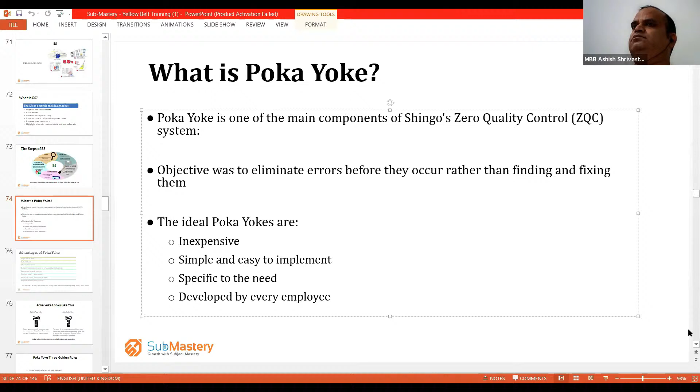What are the advantages of Pokayoke? The main advantage is it improves the quality. If you are not doing any kind of mistakes, if you are not committing any mistakes, it will definitely help you improve your quality.

It will help you reduce your cost. It really eliminates rework, because when you are not committing mistakes or defects, there are no chances of rework. It reduces and eliminates formal in-process quality control, and improves schedule delivery.

If you are not committing errors, your flow is always in the positive, forward direction. So your scheduling is much more accurate and systematic. It also prevents injury and ensures safety.

Safety is very important here. If you're using Pokayoke, it prevents all kinds of injuries. Self satisfaction improves morale - if you are using Pokayoke, you get a lot of satisfaction, and it improves the morale of employees, along with self-check quality control.

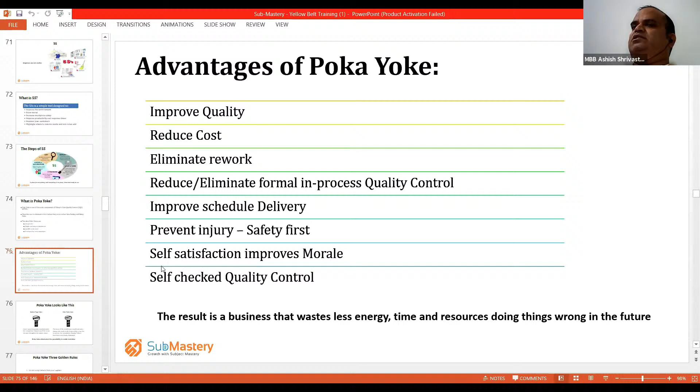Now there are a few examples you can see with these bolts, which are fasteners. In the first picture, when you are using a screwdriver, there is a chance the screwdriver can slip because the screw slot slides against the plastic cover.

But in the second type of shape, you are making some modification in the drawing, in the design. Now you can see in the second type, the chances of error are minimized. Even if you really want to slip your screwdriver, there is no chance at all - because you've made improvements in the design.

Here you can see there is a chance your screwdriver can slip. But here you don't have any such chance, because you are developing a better design here. So the chances of error are negligible - there are no chances of errors.

This is the concept of Pokayoke. You are developing such a system - it can be related to design, process flow, or anything else - so that there is no chance of error at all.

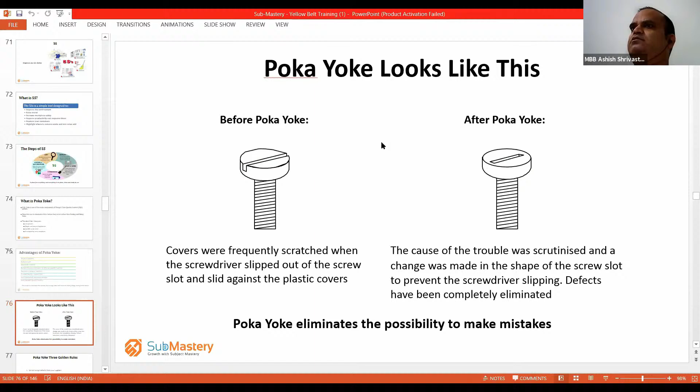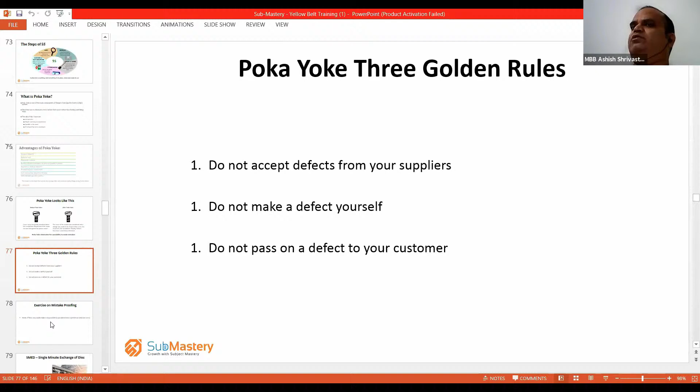So Pokayoke has three golden rules. Do not accept defects from your suppliers. When you accept defects from suppliers, these defects go into your process and finally reach your finished goods, and finally to your customer. So definitely this is not good enough. Do not make a defect yourself, do not commit any kind of defects. That is another rule. And do not pass on a defect to your customer. So these are the three important golden rules in Pokayoke. Remember all these rules.

So there is an exercise, it's a very simple thing guys. Just think, how could you make it impossible to put diesel into a petrol car and vice versa? Just raise your hands.

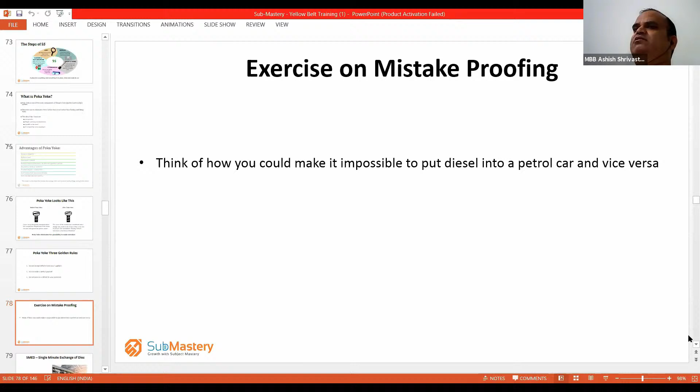There is another term, single minute exchange of die, a very famous methodology, SMED. This SMED is related to installing any tool or job on the machine, and the main objective is how fast you can do it. How fast can you install any job or tool on the machine? That is the concept of single minute exchange of die. So what is SMED?

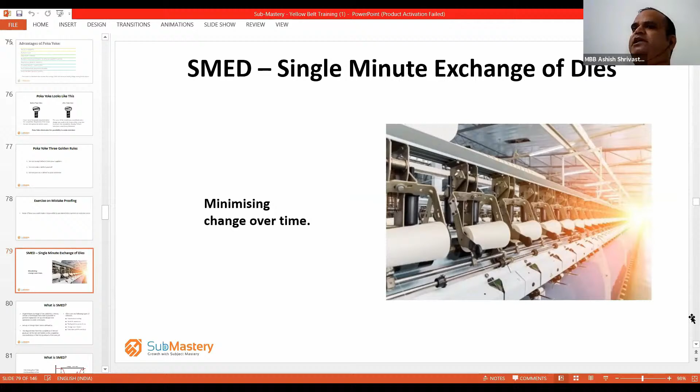SMED, single minute exchange of die, is a theory and set of techniques that make it possible to perform equipment setup and changeover operations in under 10 minutes. Not mandatory, but you have to minimize as much as possible. You need to reduce your setup time or changeover time.

You can use standardized tooling, quick fit connectors, develop changeover teams, and use the Pokayoke concept and 5S. All these combinations will give you very good timing in SMED.

For example, there are two operators. One operator installs a die or job or tool on the machine in 30 minutes, and the same job is installed by another operator within 5 minutes. How is that possible? Because the other operator is more skilled - it might be possible he has more experience also.

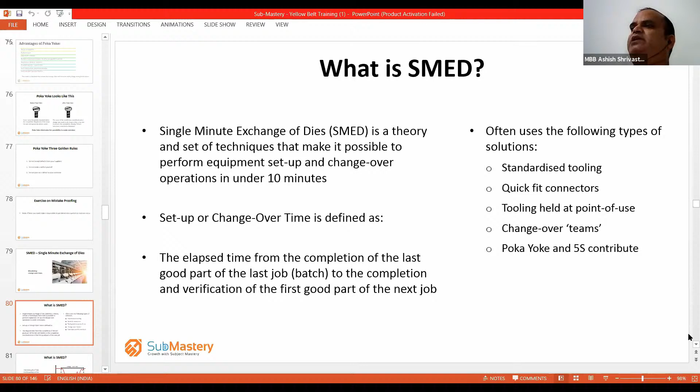So for SMED, practical training is very important. You can't do SMED only with theoretical training. You should rely on practical training. Practical training is extremely important for single minute exchange of die.

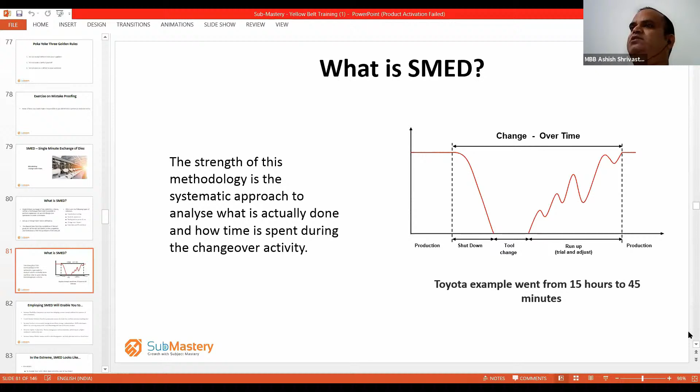Toyota has implemented this SMED. For example, they went from 15 hours to 45 minutes - a tremendous improvement in changeover time. This is something you can do in your processes also, because usually in manufacturing or production, a lot of time is consumed installing any job or die on the machine, especially big dies. If your die is really big or the installation is bulky and more complicated, it will take a lot of time, and then you have to think how you can minimize it.

There is one way - you can develop a high performance team, which we'll go through later on. This kind of high performance team in your system will definitely give you excellent results as compared to ordinary operators or supervisors.

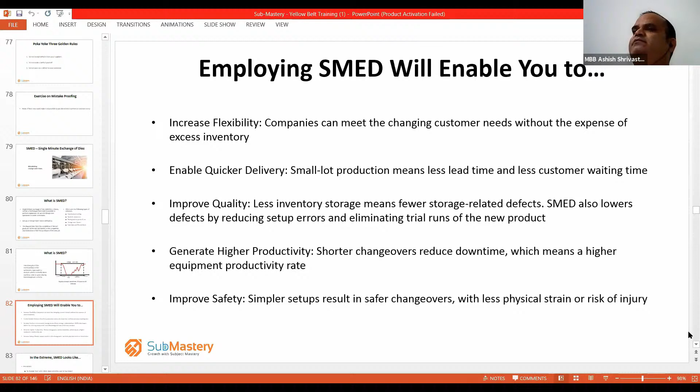I can give you one example. Have you seen Formula One car racing? This Formula One car racing is very famous - not so much in India, but in Europe, the US and these countries it is very famous. Maybe you've heard the name Michael Schumacher - he is a very famous racer.